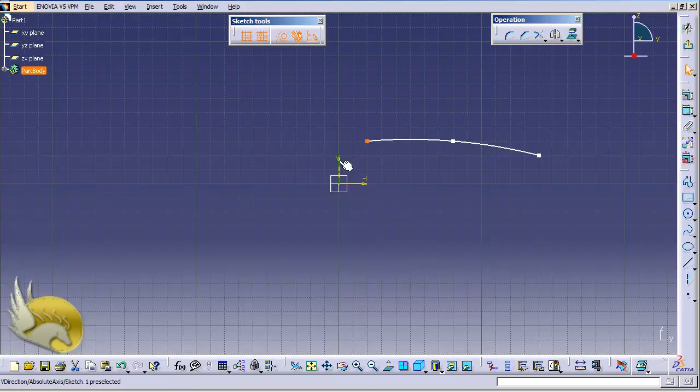Now I'm going to create the profile that's going to be used as the guide in the YZ plane, and next I'll select a perpendicular plane. So I select the YZ plane, go to the sketch environment, and select spline to create a spline with 3 points. I click here, and double click here to finish the spline. The first point should be coincident with this vertical axis, so I select both and go to constraints, select coincidence. Now you can see that this is coincident.

Now I need some constraints like this. I select the constraint tool, select this vertical line and this point, and make sure this is about 110 millimeters. I double click on this and type in 110, then double click again and type 110. Then I select the constraint tool again, select this vertical line and the last point, and make sure this is about 160 millimeters, typing 160 here.

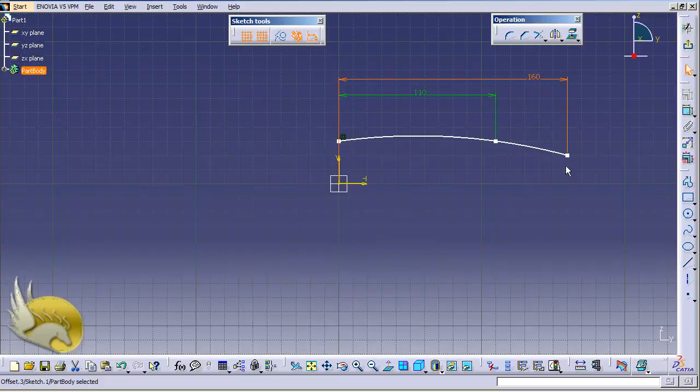Now I need constraints to show the distance of these points from the horizontal axis. I select the constraint tool, the first point, and set it to about 20 millimeters, typing 20. The second point is going to be 25 millimeters from the horizontal axis, so I type 25. And the third one is 15 millimeters away, so I type 15 here.

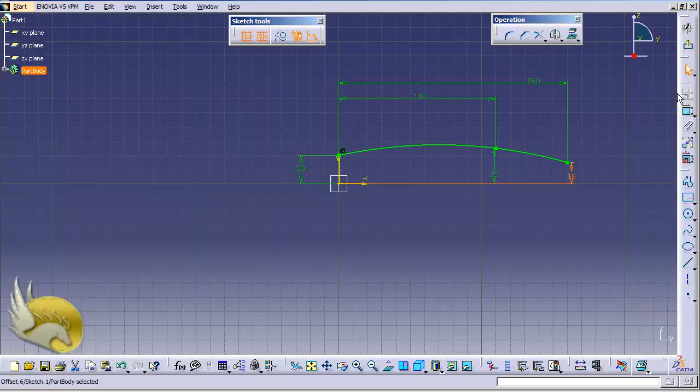Now my shape is fully defined, so I exit my workbench. The next profile, as I told you, is in a perpendicular plane—this is the ZX plane. I select the ZX plane and go to the sketch environment. Now I need to draw an arc, and I think the 3-point arc is the easiest way to create one, so I go under Circle and find the 3-point arc tool.

Now I draw an open arc. The second point is going to be coincident with this, and the third point is here, so I have an arc. Let's make the radius about 100 millimeters.

Let's move this around—if it's not working, I'm going to delete this and add the constraint again, because I want to be able to put it somewhere that's not in the middle of my work. So I want this point—I press Control and select the last point here. I want to make sure these two are about 85 millimeters away from each other, so I type 85.

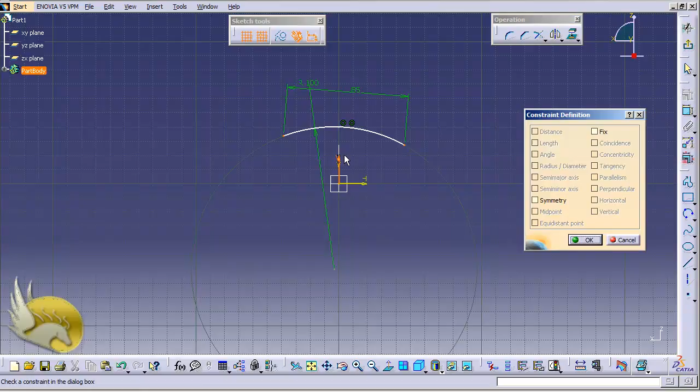Now you can see it's bending in some direction. I want to make sure this is in coincidence—the first point, press Control, second point, and again press Control for the third point. Now I want these 2 points to be in symmetry with the vertical axis, so I select symmetry. This is okay. Now I remove this coincidence—I guess it didn't work as expected, and the second coincidence isn't working either, so I'm not going to use these 2 coincidences.

But one important thing: I want to make sure this is in coincidence with the arc, so I can rotate it a little using the Shift key. I select these 2 curves—select one, press Control, and select the other—then go to Constraints Define and make sure there's a coincidence here. You can see the coincidence isn't possible here.

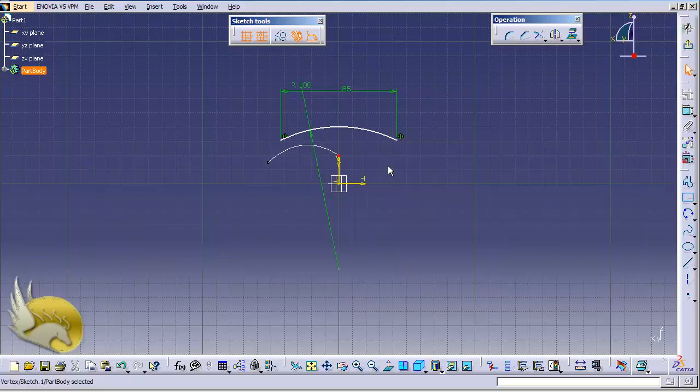I exit the constraint define tool and make sure the last point of this is selected, then press Control and select this arc again. Now I can have the coincidence here—I select this and you can see these two are now coincident. This is very important because I need it to be like this. So I click OK and exit my workbench.

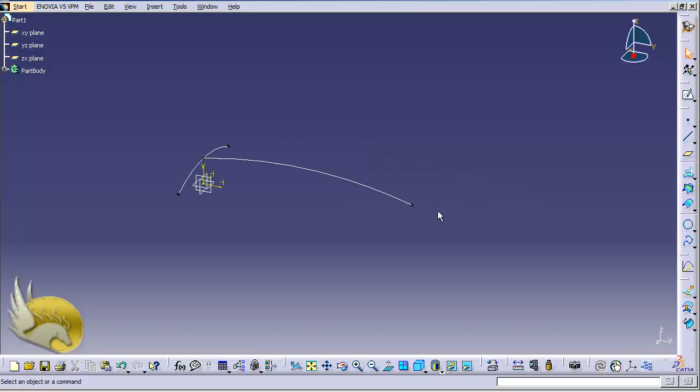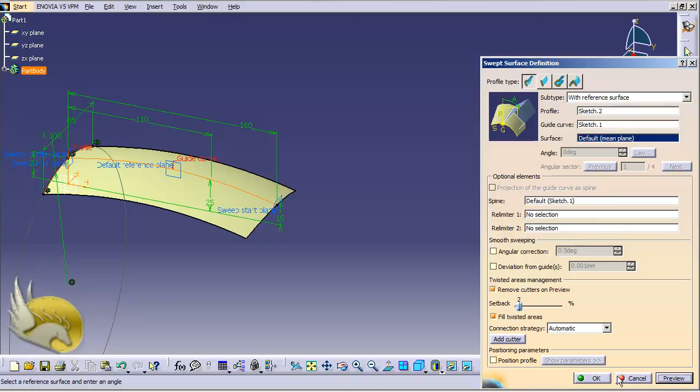Now you can see I have two different profiles. Panning a little to the left, I go to Insert, Surfaces, Sweep. Selecting the Sweep tool asks me to show the actual profile, which is this, and the guide curve, which is this. An overview of what's going on is shown, and clicking preview shows exactly what I'm looking for, so I click OK. Now this is one side of my shampoo bottle.

Let's go to Part Body and hide some of these profiles—I hide sketch 1 and sketch 2, since I don't want to see them. Now I need a copy of this on the other side, so I go to Insert Menu, Operations, where I can find the Symmetry tool. This gives me a copy of what I have here.

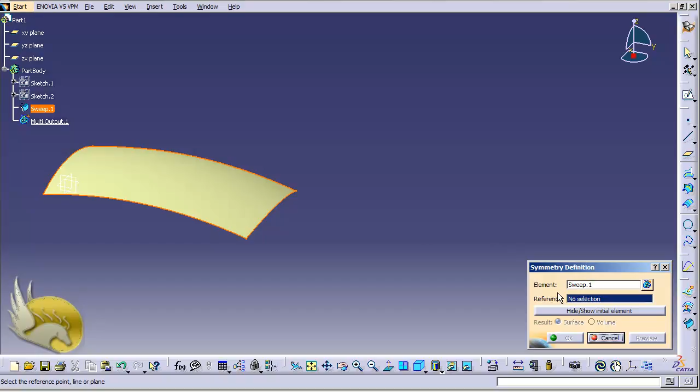I click on Symmetry. It asks what element I'm going to create the symmetry from—this is the element, so I click the Sweep, the surface created here. Now it asks for my reference; I can select one of the axes or planes. I want to make sure this plane is parallel to the face, so I select the XY plane as the reference. I see a preview of this face, so I click OK.

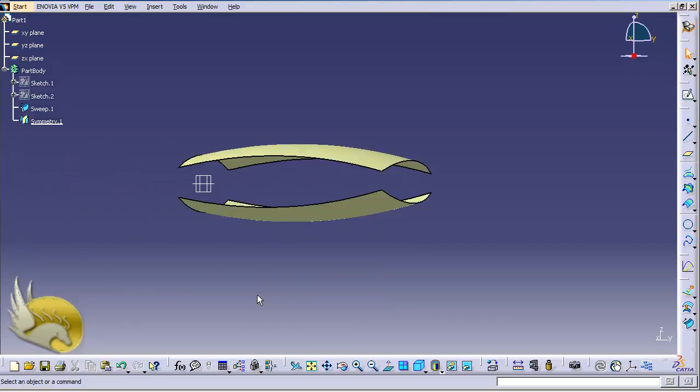Now, panning to the right, you can see these two faces created here, and they are in symmetry together according to the XY plane.